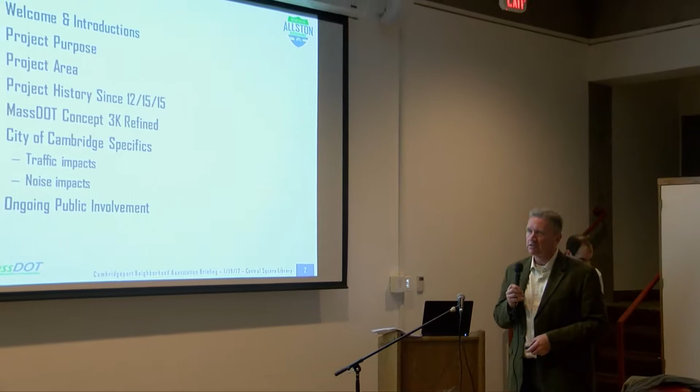So, meeting agenda. I just did the first phase, project purpose. The purpose is that we have a deficient interchange out there right now. The existing viaduct has faced a lot of deterioration over the years. Many people would regard it as neglect, and unfortunately, that is the case.

There is so much demand on the bridges, substructures, foundations, and viaducts throughout the Commonwealth that sometimes our important structures get on a backlog of concerns and immediate repairs. This is one of them. It was built back in the early 60s, so we're here now almost 60 years later identifying the concerns and issues we have.

AET—for all of you, the transponders—all-electronic tolling. This provided us an opportunity to consider how we modify the interchange so it becomes a seamless transition between the existing viaduct and coming out from, say, the Pike, heading west on I-90, without having to go through the various winds and turns that are on I-90 right now.

With AET eliminating the tolls, stopovers, and slowdowns at the plazas, you can go straight through and maintain a regular rate of speed—not necessarily faster than now, but without a lot of the stop and go. That results in a reduction in noise and a lot of the braking actions and trailer concerns.

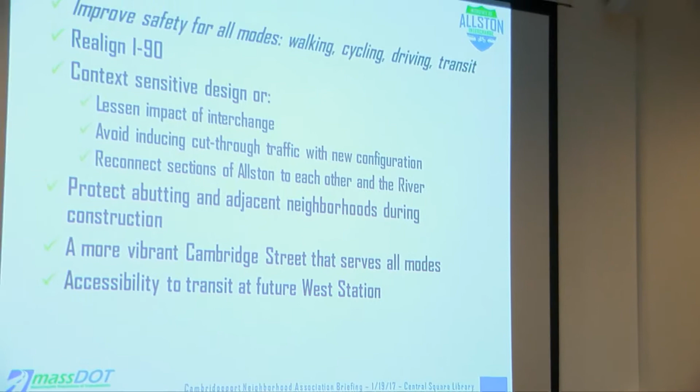What we look at this as being, from day one, is an opportunity to create a fully multimodal interchange. I say that not lightly, because we recognize some of the deficiencies that we have with regards to bicycle, pedestrian, recreational uses, transit, and bus options. Our ultimate goal is to be able to improve upon and address all of those areas that are lacking right now.

There's no laser on this, but I want to—Center button, Mike. Center button. Oh, it is, okay.

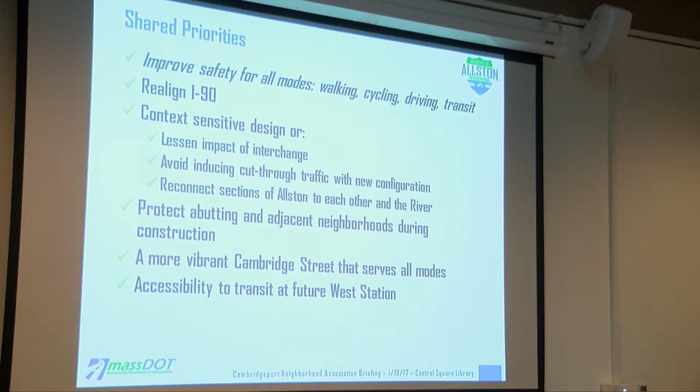Protect the abutting and adjacent neighborhoods during construction. That is of critical concern to us on every project we do. We try to get in and get out and not disrupt the entire livelihood in the neighborhoods that exist, whether it be businesses or residential, whatever the case may be. We strive to do that on every project we undertake. It's not always possible, but to the extent we can, we want to mitigate those and minimize those concerns.

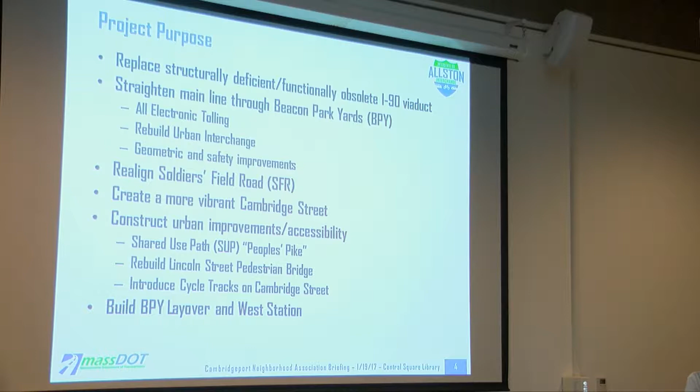Here's the project purpose. There's a lot going on here between replacing the existing viaduct, straightening I-90, and realigning Soldiers Field Road, which is something that has only come about very recently. This gives us the opportunity to realign Soldiers Field Road and to expand upon the existing Paul Dudley White Path, which many of you refer to as the throat, creating additional acres of open space adjacent to the Charles, while at the same time continuing the functions of Soldiers Field Road and I-90.

How does Cambridge Street fit in? Cambridge Street will become the touchdown point for the interchange. What exists right now is really two primary ramps coming off of I-90 east and west. There will be four points of access and egress between I-90 and Cambridge Street, which will then be the separation point between points on Cambridge Street.

I'm confused, because Cambridge Street is, I think, over across the Longfellow Bridge. Oh, that's a good point. Yeah, so Cambridge Street in the Boston area versus Cambridge Street approaching Main Street in Cambridge. I see.

And the layover in West Station, as I mentioned. I see. The project area.

That area right now constitutes about 91 acres. It's significant when you look at it from an elevated point of view—say if you're on top of Cambridge Street at Allston Village, at the overpass, looking east towards Boston, and you look at the entire area once occupied by CSX. It constitutes about 90 acres of land that will be developed at some point in the future.

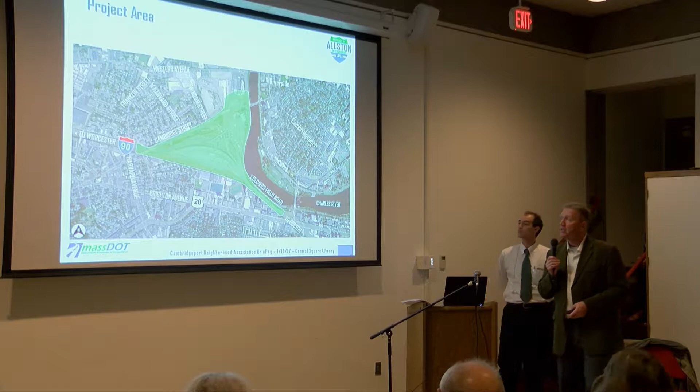The landowner is Harvard University, so there should be no surprises to any of you. It's been long, widespread information out in the public for many years now. But Harvard University owns it. MassDOT retains rights to continue its transportation easements and functions through this area.

I-90, all of the ramps and connecting roads, will bring you back into the neighborhoods. There's a lot of regional use, and we recognize that regional traffic is also being accommodated within a neighborhood, so it's incumbent upon us to try to integrate those two functions—a regional interchange, while also acknowledging that we're introducing regional traffic into a neighborhood.

And this is when I'm going to hand it off to Nate Cabral Curtis, who has been handling our public outreach. He's a member of our design team, and he's going to carry you through. I'd ask that you hold any of your questions until Nate is done. We'll be here as long as it takes for you guys to walk away with all the knowledge you need.

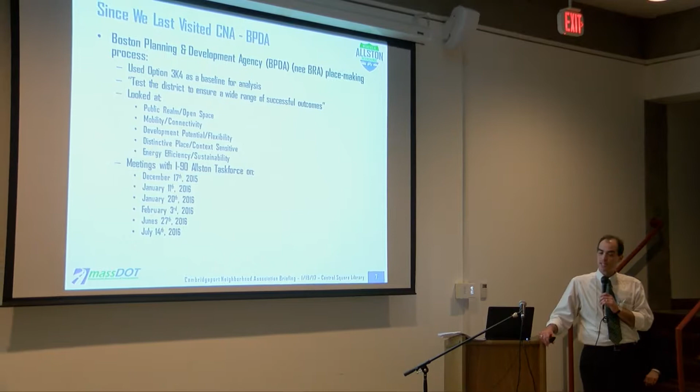When we spoke with you last year, or the year before in 2015, a study was just getting underway in conjunction with this process by the Boston Planning and Development Agency, formerly the BRA. In their placemaking process, they used the option you saw last December as a baseline, called 3K4. The goal, in their own words, was to test the district to ensure a wide range of successful outcomes - can we build a good neighborhood here? They looked at public realm and open space, mobility and connectivity, development potential and flexibility - how easy is it to get various buildings of different types into this space - making it a distinctive, context-sensitive place, and energy efficiency and sustainability. They met with the I-90 Task Force on all these dates, and produced their work in the fall of last year.

Much more information on that is available on our project website.

I'm going to try to curtail as much of the history lecture as I can, because I know at the Morse School meeting people got impatient with me. So I'll speed through some stuff, then slow way down on the Cambridge issues. As the compositor of this PowerPoint, I was happy to know I've touched on all of Mayor Davis's issues, and also Bill Degnan's, who sent them to me as well. So thank you both.

Representative Livingstone, thank you, sir. Do you want to say anything?

I appreciate you coming to Cambridge. This project has a lot of impacts on the neighborhoods - the designers are all across the river - so I appreciate you coming here. A lot of people here have a real say. Thank you very much, sir.

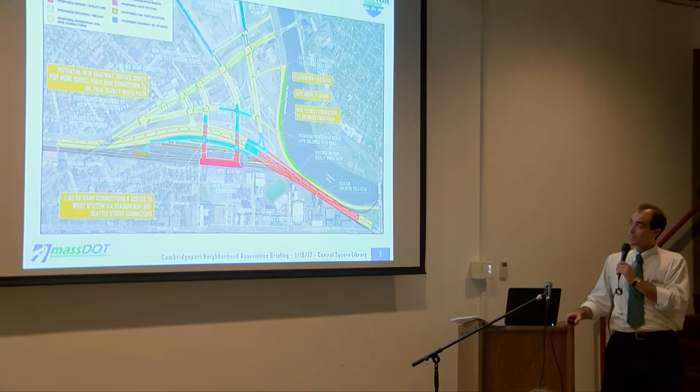Okay, so you'll all remember this. I won't dwell on it, but this is 3K4, what you saw in Cambridge on December 15th, 2015. The BPDA began working on this, and came up with a number of recommendations in all of these various areas.

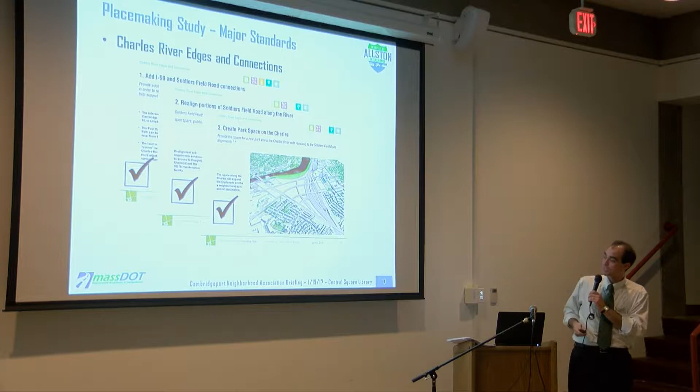Some of these Mike alluded to, some we'll go through here. First, add I-90 and Soldiers Field Road connections - something we'll talk about later, and something our refined 3K includes. Next, realign portions of Soldiers Field Road - currently it runs along the track of my laser pointer, but with the refinements we have the opportunity to drop it further back into the parcel, increasing green space along the river, creating park space along the Charles. This and the right-turn at River Street are linked - by doing this, there's an opportunity to create an at-grade connection, with no footbridge and no dismount, for bicycles and pedestrians from Allston out to the river and the Paul Dudley White path system.

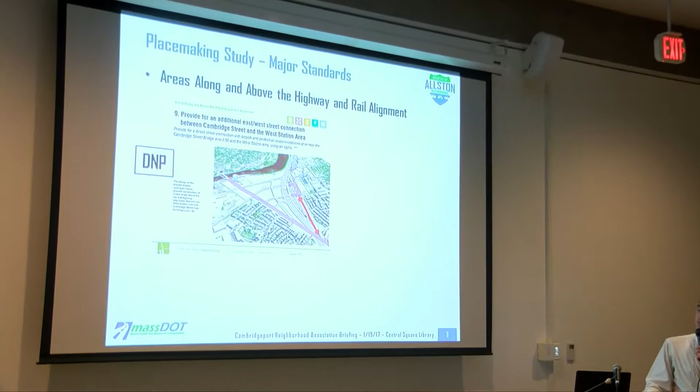I'm also going to go through some things which 3K Refined does not have in them, but carry this symbol, DNP, standing for Do Not Preclude - meaning the design doesn't include it for purposes of the DEIR document, but the design accommodates it. One item was a direct viaduct connection from the Cambridge Street Bridge in Allston over to the area of West Station - do not preclude. Another is a north-south link for shuttles and buses through West Station - again, do not preclude.

And then this was an idea - actually from Cincinnati, where my second in command at Howard Stein Hudson hails from - a bridge with an apron. The idea is to give any bridges we have some space around them to make them a little more livable.

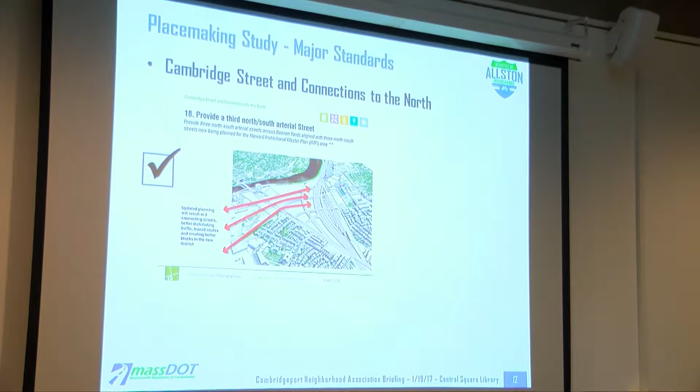Some more items: you'll see three new streets running north off of Cambridge Street and heading up towards Western Avenue - you'll see that in 3K Refined. There's a change in our connection of North Harvard, heading up into the neighborhood and up towards Harvard Square. And we'll strengthen the Cambridge Street edge for early redevelopment along the southern edges. One thing you can't see in 3K Refined, but the plan includes, is cycle tracks and separated sidewalks along Cambridge Street on both sides, and protected intersections in accordance with the new MassDOT and City of Boston guidelines.

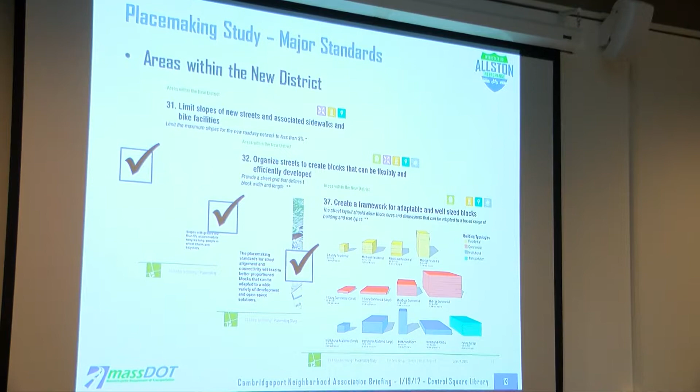Then these are some things we already did: limiting slopes in the new district to less than 5%. We had that opportunity in 3K4, and we're even doing a little bit better now with the refined version. We organized the blocks such that they make easy developing—they agreed we had that—and created a framework for adaptable and well-sized blocks, which again, we have. If you do all those things, you come to 3K Refined, which is this.

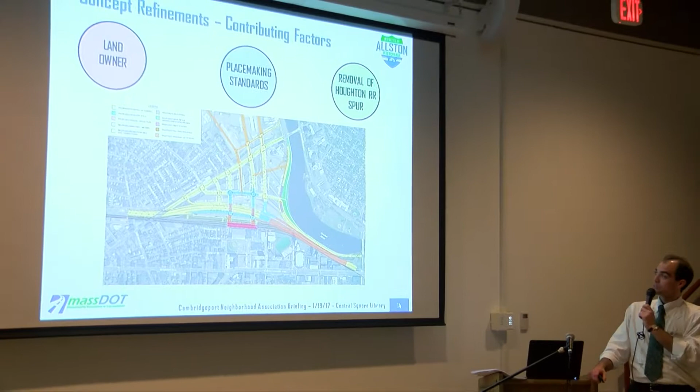So you have the landowner input, which Mike talked about. You have the placemaking standards from BPDA. And in addition, you have the recent arrangement of Bruce Houghton at Houghton Chemical to give up the rail spur that runs right along here, which allows us to perform this shove-over activity. When Mike came before you, I was reading the minutes from 2015—somebody asked, well, can't you just flip the rail spur around? His response was, we've tried that every which way and someone always gets hurt. So in this case, the rail spur will be gone so we can drop the roadway back into the parcel. Those are all some contributing factors to how 3K has become refined.

So now I'll walk you through all those in some detail.

So we're able to realign I-90 so that it is straighter, or closer to straight—it still has a bit of a curve in it. This decreases the slopes going up to West Station, which is great for bikes and pedestrians and people with limited mobility, and it allows some adjustments for the street network.

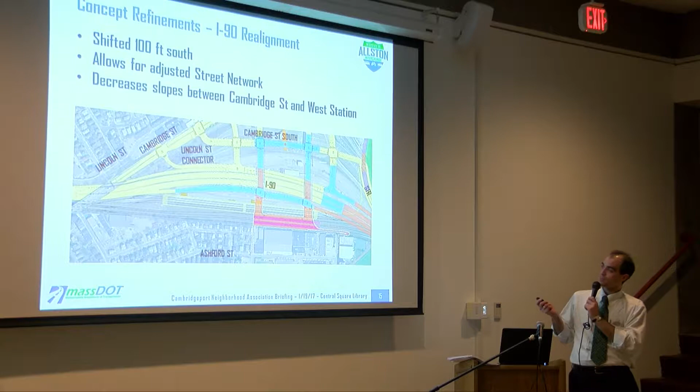So that dotted line shows you the center line where it was in 3K4, and this shows you just how much it's shifted to the south. Now I'm going to come to this, and I'm going to show you this slide again when we do Cambridge specifics.

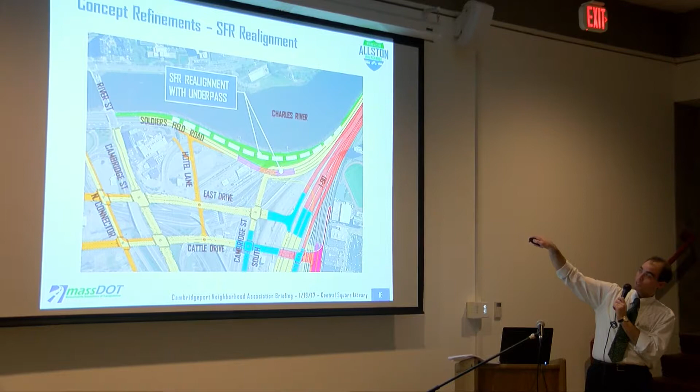So this is also part of the way this works. You have the main line of Soldiers Field Road continuing outbound towards Buckingham, Brown and Nichols, and other points west. It goes down into what we call a boat section, similar to what's up here. That would come down, pass underneath this roadway connection right here at the surface, and then behind this, so you wouldn't necessarily have to get involved in an intersection—you'd have your bicycle and pedestrian connections out to the river.

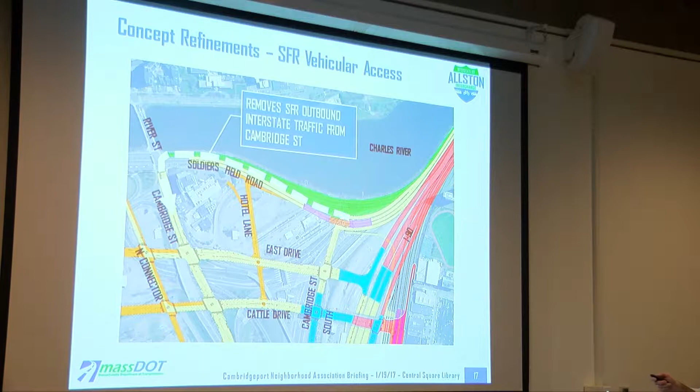Now that comes with a change. So the off-ramps here, to let you make this move and that move, are now accommodated down here. This white arrow that's just come in shows you how the traffic would access—instead of going up here, it would now come down here, go over the top of that boat section, and get into the system here. So now it accesses River Street to go.

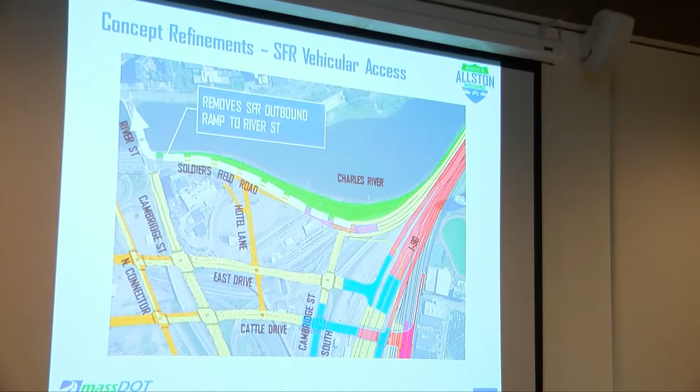Hang on, we'll get to that in a minute. So then this is removed, and I'm going to gently ask people—so that I can get to the Cambridge-specific stuff, specifically the issues about noise—to just hang on to the questions until the end, just as we did at Allston, if you would be so good.

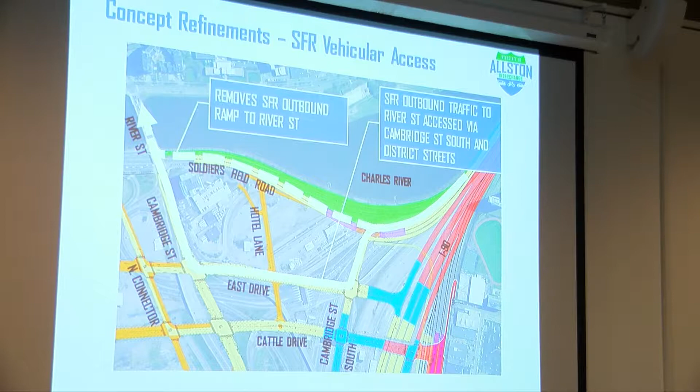Okay, so now this is the thing we want to talk to you guys about at length tonight and get your thoughts on. If you were coming home to Cambridge from downtown Boston or from the airport today, you make this move—take a right at the bridge. In the future, assuming this is taken further into the plan, you would make this move instead. Right now, you pass through one signal. Under this option, you pass through three. So just hold that in mind.

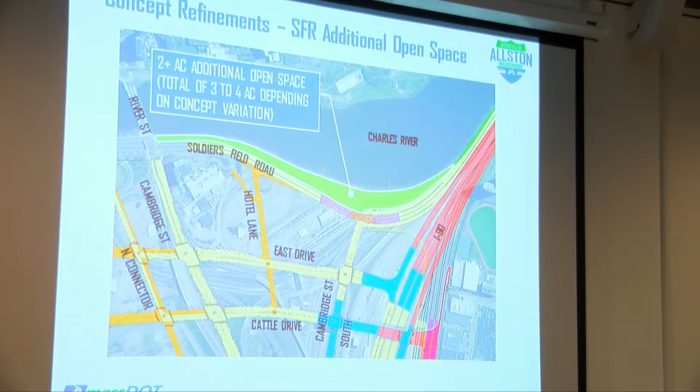The whole thing taken all together, earlier we had looked at realigning this portion of Soldiers Field Road. We could have done that under 3K4. Depending on which option you pick, for the various throat options down in here, you can get up to 4 acres in total of extra green. But 2 of that is always up in here, assuming we keep that.

This is that at-grade bicycle and pedestrian connection that I mentioned. You get the widening at the narrows.

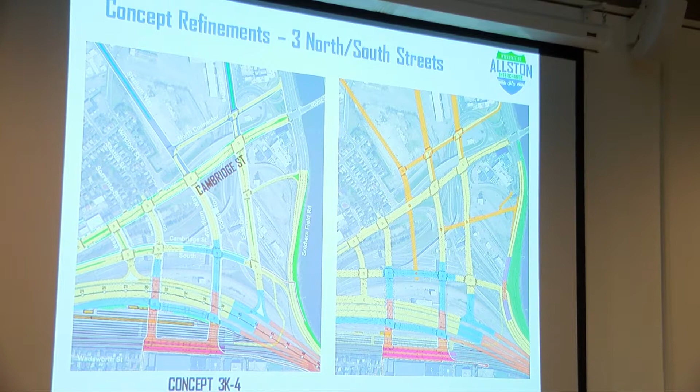Now, this is the 3 streets to the north. In 3K4, there were 2; now there are 3. Part of that is linked to the realignment, or the different connection, of North Harvard Street. Our modeling to date has shown that if you just direct connect North Harvard Street without these 3 streets to the north, all the traffic flows up that way. We've heard from the Allston community that that's their last bastion of owner-occupied housing that's not been taken over by students, for better or worse, and they'd really like to keep it that way. They also already have the 66 bus on there and bicycle lanes, which are heavily used by local folks. So part of trying to make this direct connection work, without causing the flooding of traffic they were talking about, is having these 3 streets running off that way.

So again, just highlighting those. They pass through the Harvard University Enterprise Research Campus.

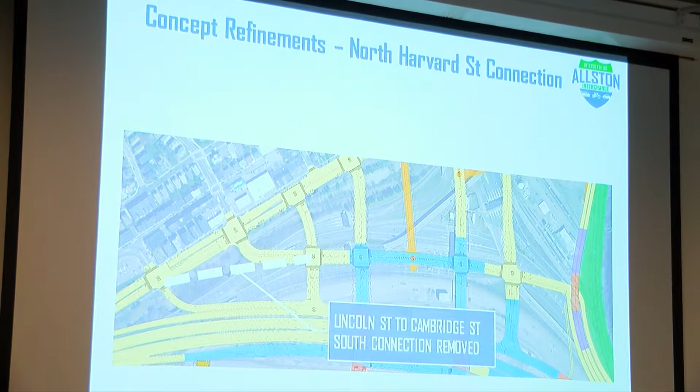Then this is that North Harvard Street connection I mentioned. In 3K4, you would have seen it tying in here, so you wound up with a kind of funny triangular parcel down here. In this case, traffic comes right into this intersection, and if it needs to go up this way, it can go straight across. So there you go.

And then the thought would be that along the top, or northern edge, of what we call Cambridge Street South, you would have a cycle track facility, and a sidewalk obviously, that would bring your riders directly out to the Paul Dudley White Path. At grade here, no footbridge.

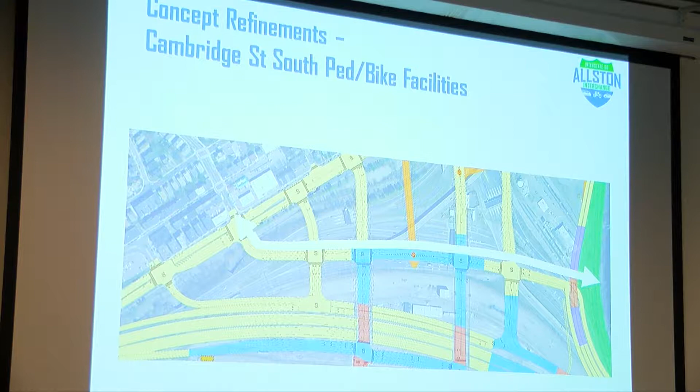And that's everything. I'm not going to read everything on that slide, but that is the handout that you all got at the back of the room, so you can take that home with you. Again, this will be posted on the website. This particular graphic is already up.

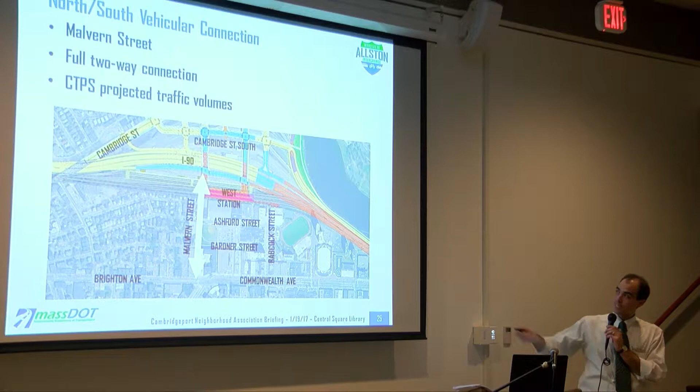Now, this is some stuff that I may flash through if people are getting antsy, but one of the things we talked a lot about was the desire, at least last December, from the crowd we had at the Morse School—the big interest was a transit connection across through here.

The design as it stands today has a bicycle and pedestrian connection which has always been provided here. So bicycles and pedestrians, for quite a while now, almost 2 years, the plan has contained the idea that you'd be able to start out on Cambridge Street, ride along on a separated facility, come up the ramp, get into West Station. If you wanted to drop down, come out Malvern Street and go to Commonwealth Avenue.

However, as part of our MEPA certificate, we've had to look at this for a full vehicular connection that is general purpose, anybody gets to use it, and also transit. So I'll just flash through some of that now.

This is an output from the CTPS model, and in essence what this is showing with this very red section here is that if you create a new general purpose connection for all kinds of vehicles, a great many cars would like to use it. The thought is that causes some changes heading down into Brookline.

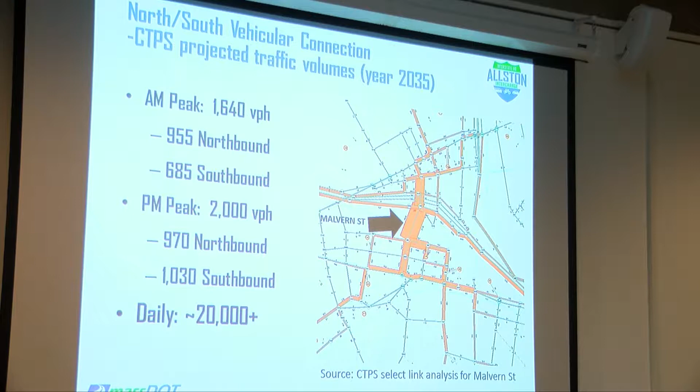I just want to let everybody know some of the traffic data I'm presenting tonight will be subject to change, because 3K Refined needs to go through the CTPS model again. But this is still kind of useful and indicative. So again, general purpose traffic—it's kind of a game changer. And just to give you a sense of this, this is the end of Malvern Street.

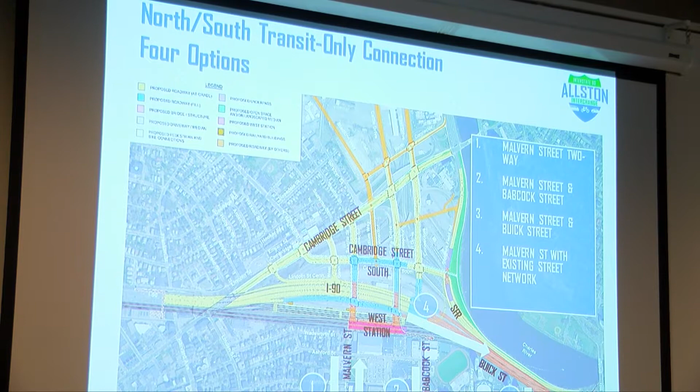It's trying to put a lot of sand through a very small hourglass, I think. It's tight. So then we began to look at, okay, all of these things will be laid out fully in the DEIR document that Mike mentioned, but let's pass on from full vehicular and take a look at transit.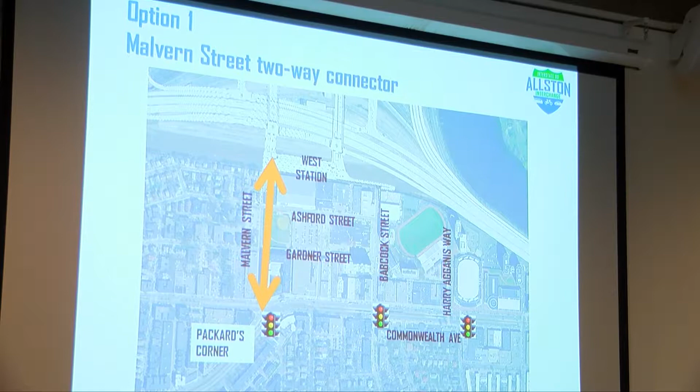We have a couple of different options that we looked at. One is Malvern Street two ways, and that has every transit vehicle going in at Packard's Corner and coming out at Packard's Corner. For those of you who know it, it's quite the complicated intersection. You've got the main line, carriage roads on either side, and the green line. So part of the issue is, right now at Packard's Corner, you have a very long route for a transit vehicle to come out here and head downtown.

That has some issues associated with it, as you can see. One of the big ones is it takes a long time to clear through that intersection, and it's not really set up to have that movement happen. Right now, the only movements on Malvern are this and this. So that's tight, and the expectation is a fair bit of conflict there.

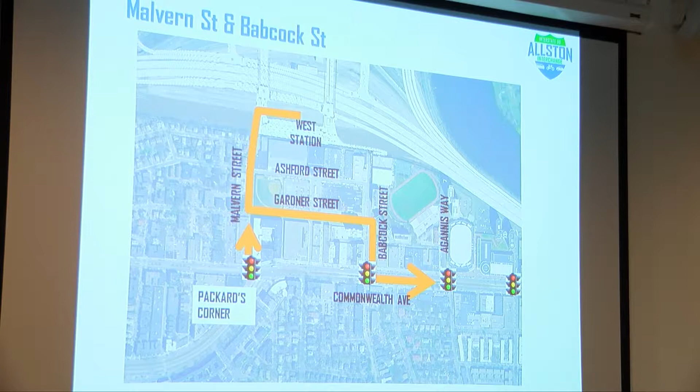So then another option is to come down from West Station and kind of doodle through the campus and come out on Babcock. That also has some impacts, so you have some changes that you have to make. I know this is a bit boring for this side of the river, so we can come back to these. But it does get you out of some of your impacts at Packard's Corner if you take this approach.

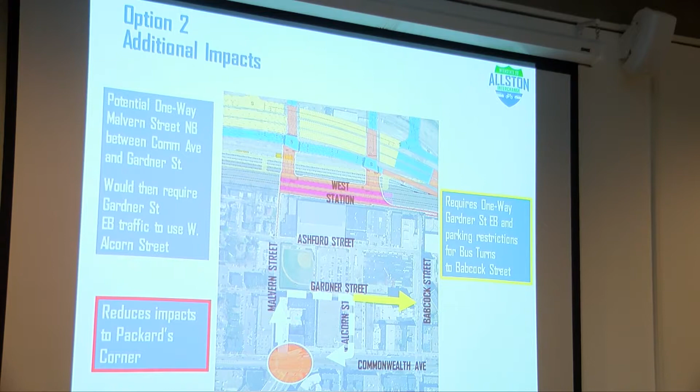It does require some one-ways because you've got to make enough space for the bus to make its turn. One of the things we've heard is that BU already stages a lot of buses through here for sports and games and things. There is somewhat of a difference between moving in a whole bunch of buses for a sporting event very slowly and trying to run a transit service.

So if you go down to this area today on game day, yes, you might see some Peter Pans or Crystal Transport, that kind of thing parked. But it's different doing that and getting 4 or 5 in for a field hockey game versus running them all day. Again, some removal of parking is required to get some of these transit vehicles through.

Then this is another option, Malvern Street and Buick Street. So you have kind of an interesting circulation here. This is your return to West Station, and then you're coming through West Station and out via sort of the backside of the campus in Buick. That also has its kind of ups and downs. These are both private ways owned by BU.

There's also the issue of this being the back of house. So when something happens at Agganis, and there are quite a few events there a year, BU flips the traffic pattern to get people in and out of this place. So you can get a bus or two in there today, but if you're looking at a lot of buses, a steady transit service, there are some changes to be made. And it does come with some private property takings, which we do try to avoid.

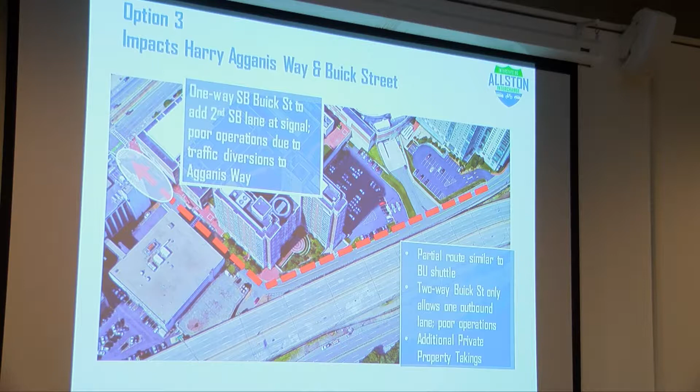Buick Street is a little tighter, so you have to make some changes there as well. And then this is actually one interesting option, which is to use Malvern Street to go in, and then the existing highway system to go out, so the bus could actually travel on the highway, come down, get off around the Prue, make connections in the medical area, and then its return back is something via the local roadway system. All of these options will be explored fully, the ups and downs, in the DEIR document, and you'll have an opportunity to comment on them.

So what to expect in the DEIR? Mike has really kind of gone over a lot of this, but the 3K refined is the option that we think we're taking there. There will be 3 variants for the section opposite Magazine Beach.

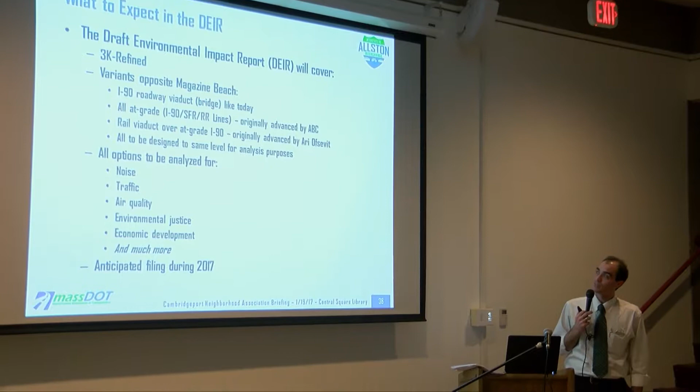So one option is a roadway viaduct bridge, which is what we have today—obviously a different bridge, one that isn't in its dotage. Another one is just doing everything at grade, so that's the rail next to the road, next to the road, next to the road. That was originally advanced by A Better City, so you may have seen that as the ABC concept. And then there's a rail viaduct over an at-grade I-90 and at-grade Soldiers Field, which was originally advanced by Ari Ofsevit. Some of you may know him as the amateur planner.

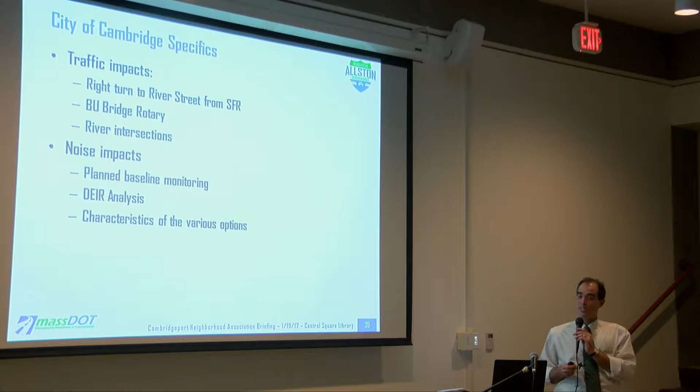And they'll all be designed to the same level for the purposes of analysis. Everything's going to be analyzed for noise, traffic, air quality, environmental justice, economic development, and a whole lot more. As Mike said, it will be a big document. So thank you for your patience. I now want to get to some stuff directly touching on Cambridge.

So I wanted to show you this one more time. This is the removal of that right turn and the left turn, and accommodating those turns at this boat section, and sort of a flyover of it right here. That's what the proposed 3K refined has in it, specifically for folks coming home to Cambridge.

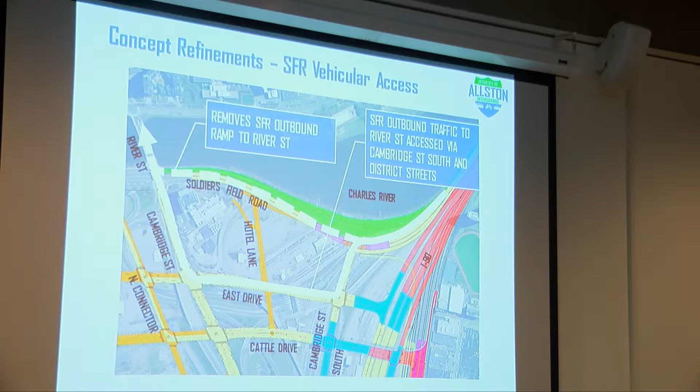Where does the left turn go? The left turn would actually be accommodated at the same location. So if you were to make a left at this location today and head over to one of these highway ramps, you would get off here, truck down here, and instead of making this off to Cambridge, you could head off into the ramp system this way.

So that's a trade-off, and I want to get your thoughts on it tonight. It allows a real alleviation of the narrows on the Paul Dudley White path. There's a direct connection for Allston cyclists, obviously, and it provides your Cambridge cyclists with a safer right turn coming back over the bridge because it's a bigger space and they're less likely to tangle up with somebody else.

From the car perspective, there's roughly 9,000 vehicles turning right to Cambridge every 24 hours. There's 87 during the peak hour in the morning, 151 during the PM peak hour. Again, all these things will have to go through the CTPS model again, but speaking with Eric Mackey, our traffic engineer, right now the back-of-the-envelope estimate is 3 more signals and roughly 3 minutes of additional delay versus the direct connection today.

One of the questions posed to us is, well, could you just keep the right turn? The issue is you can't keep a single right turn exit to Cambridge because of the width you need. You need an 11-foot lane for the turns, plus an 8-foot clear travel lane in case somebody breaks down in the actual turning lane. You need to be able to squeeze an emergency vehicle by. So from a roadway perspective, it seems like, again pending full analysis in the DEIR, it's a bit of an all-or-nothing in terms of pavement there for cars.

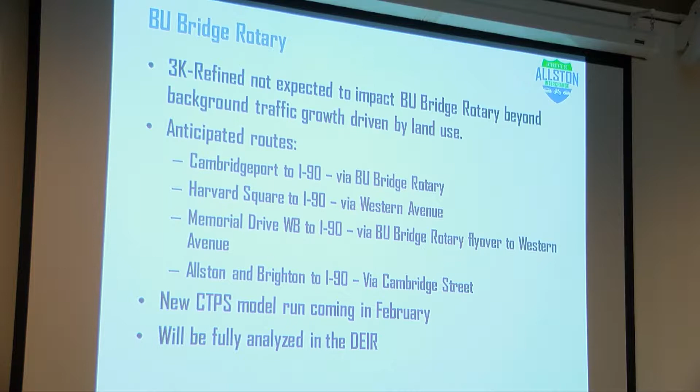BU Bridge Rotary: the 3K refined, again these are back-of-the-envelope numbers from Eric, will be discussed further in the DEIR, but it's not expected to really impact the BU Bridge rotary beyond background traffic growth driven by land use in the area. These are the anticipated routes we feel traffic would take, and as you can see it's a limited population looking at that as a route to the BU Bridge Rotary. One thing we'll have to test is if you had a direct connection down to Commonwealth Avenue for general purpose traffic, you might see some changes there.

Again, new traffic data coming in February, full analysis. The River Street intersections — I think of it as the four square, so the 2 River Street intersections and the 2 Western Avenue intersections. We have ongoing discussions with Bill Deignan and other members of the Cambridge traffic transportation staff on that. The current thought is a leading pedestrian interval on all of those intersections to help cross bikes and peds. The interchange design going from 3K to 3K refined doesn't really change how people would use those intersections, but some of the land use decisions within the parcel, depending on what goes there, could impact the volumes.

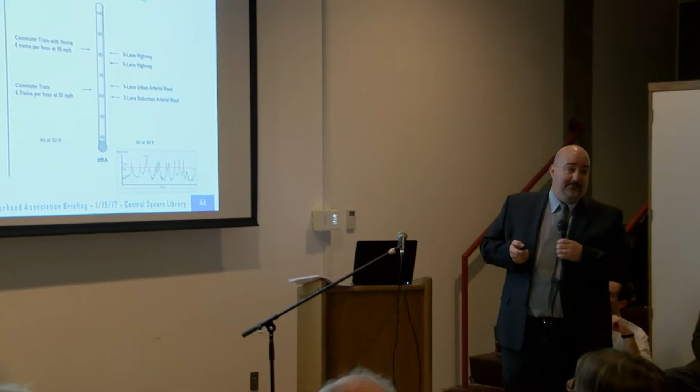As you can see here, we can certainly understand what the maximum sound level is of some of these events. When a truck goes by at 50 feet, we might have sound levels up at 80 decibels. Comparing that to some of the noise sources that we commonly experience indoors, we might correspond that to shop tools or a food blender.

And so this maximum noise level is very intuitive, but it doesn't really relate to how we feel and whether or not we're annoyed by noise. When we're looking at noise impact, that's really the fundamental thing that we're trying to minimize, is the potential for humans to get annoyed by noise.

And so to do that, we look at a sound level called the LEQ. This is an equivalent sound level. You can see here sort of the time-varying nature of sound. It rises and it falls. The LEQ is an energy average of that sound level as it rises and falls over a given period. We look at the loudest hour of sound, and that is the LEQ, and that's how we describe sound.

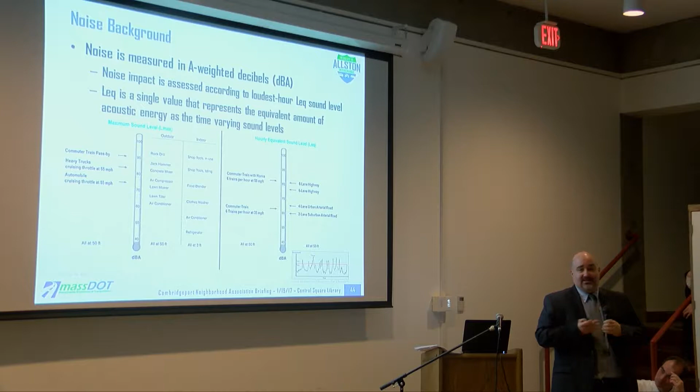Some important things to understand in terms of the physics of sound is how does it relate to traffic noise? Well, certainly the volume of traffic is a very big factor in determining how loud the noise is at your location, at a receiver. So if you double the amount of traffic, let's say you have 2,000 vehicles in an hour compared to 1,000, that's a 3 decibel increase.

The number of trucks, sort of the fleet that is driving on the roads, is also an important factor. Trucks make a lot more noise than automobiles, and so one truck is actually equivalent to 28 cars when you're traveling at 55 miles an hour.

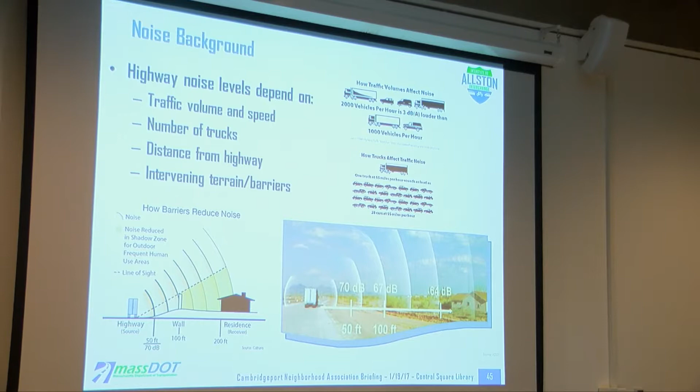And of course, as we all understand, sound reduces with distance. When we're talking about highway noise, that relationship is to reduce noise 3 decibels per every doubling of distance. So as I was showing, some of the sound levels from roadways might be 80 decibels at 50 feet. At 100 feet, they reduce 3 decibels and be down to 77 dB.

Another thing to understand with noise is that the path that noise takes to get from the roadways to residences, to schools, is also a very important factor. When you have intervening objects such as noise walls, such as Jersey barriers, such as buildings, when you can't see the noise source, that's a fundamental effect to attenuate the sound. And so these are all the things that go into the model and our predictions of what the future noise conditions will be like with the project.

So where are we with this noise study? We have conducted noise and vibration measurements throughout the entire study area. We conduct these measurements in order to develop a model. These are models that are developed by the Federal Highway Administration and the Federal Transit Administration for trains. And we conduct noise measurements in your communities to make sure that the model that we're using is valid and that it's providing accurate results.

So we are in the process of conducting this modeling for future conditions. We have an understanding of what it is now, of what the existing conditions are, and I'll be presenting some of that information to you. But it's important to understand that it's really a factor of what the future conditions will be and whether or not the noise levels will exceed certain limits in terms of whether or not there are mitigation that may need to be introduced to the project.

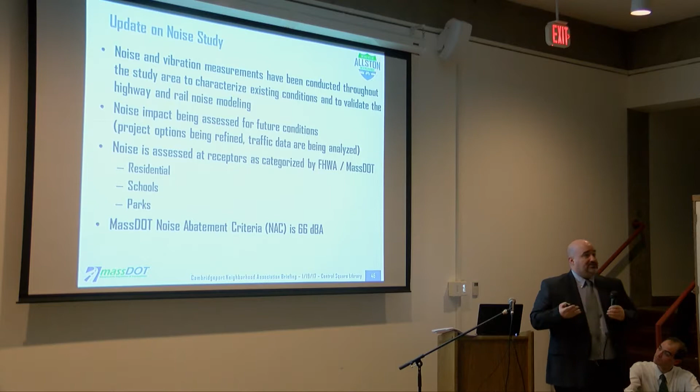As Nate mentioned, the CTPS traffic data are currently being updated with the refinements to 3K, as well as some other refinements to the geometry that are ongoing. When we look at noise, noise isn't assessed everywhere.

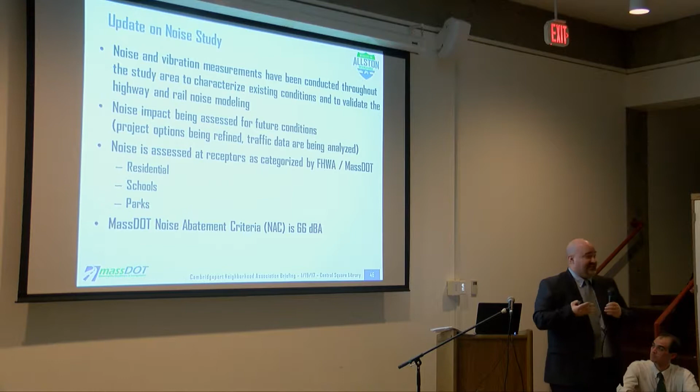There are some areas that noise has a greater effect on us, and that's certainly our homes, residences, schools, museums, libraries, places where peace and quiet have a lot of value, where noise might interfere with speech or sleep. Areas that noise does not get assessed, or is not really considered a receptor, include industrial and commercial areas that primarily have daytime use and generally higher background noise levels.

This is all based on standard guidelines from the Federal Highway Administration. We also look at parks, which is also a very important area—parks with passive use where there's benches, picnic tables, places where peace and quiet is of value. Noise gets assessed at parks as well.

When we look at noise, we really look at whether or not the noise levels are exceeding a noise abatement criteria, and whether or not the project needs to evaluate the feasibility and reasonableness of mitigation. For residential receptors, that noise abatement criteria is 66 dBA. So that's an important number to understand—as sound levels approach or exceed 66 dBA, they're breaking a threshold.

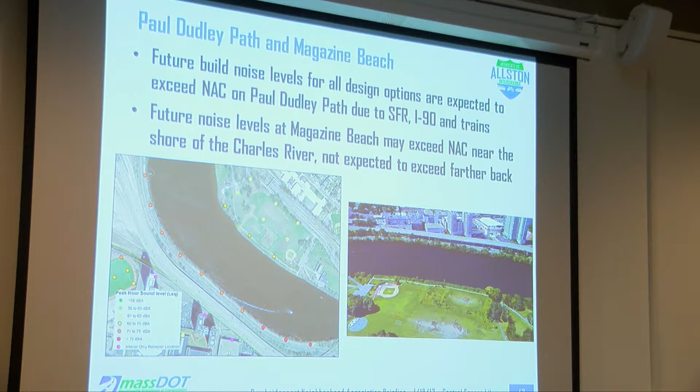What we're showing here in the colors is what the general noise levels are right now—what we understand about existing conditions. Along the Paul Dudley Path, which is considered a trail or park use, we have high ambient noise levels right now, between 71 and 75 decibels, exceeding the noise abatement criteria for park use.

When we look at Magazine Beach, as a function of the distance that Soldiers Field Road and I-90 are from Magazine Beach, the sound levels attenuate significantly. Receptors just along the trail, near the shoreline, are just barely exceeding the noise abatement criteria. As we get farther back, closer to Memorial Drive and more in the middle of the park, these sound levels are below the noise abatement criteria right now. This is our understanding—we've done measurements and modeling, including contributions from both highway noise and rail sources.

So what does this tell us? This tells us that we understand future noise levels at Magazine Beach may exceed the criteria just at the shore of Magazine Beach, but not necessarily much farther back into Magazine Beach.

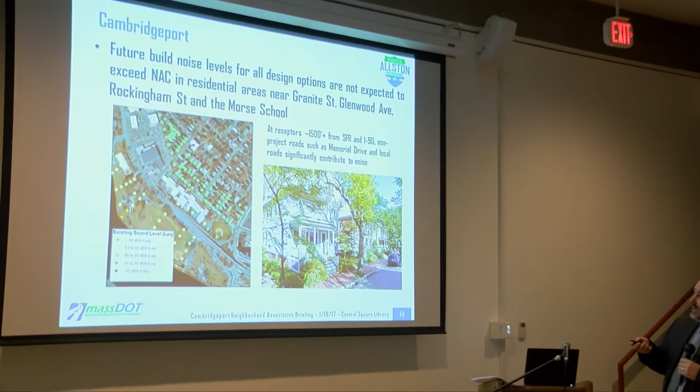So we're also looking at receptors deeper into Cambridgeport. We've heard that this is of concern to the community, and we want to know what the noise environment is and whether different project decisions can affect the noise in the community. Looking at receptors on streets such as Granite Street and Glenwood Ave and at the Morse School, we find sound levels significantly below the noise abatement criteria. A measurement at Glenwood Ave showed sound levels in the upper 40s, around 50 decibels—15 or 16 decibels below the noise abatement criteria.

So what is contributing to the noise environment here is a lot of other noise sources besides I-90 and Soldiers Field Road. Memorial Drive is one of the more dominant noise sources here, but you also have local traffic on Magazine Street and other roads contributing to the noise environment.

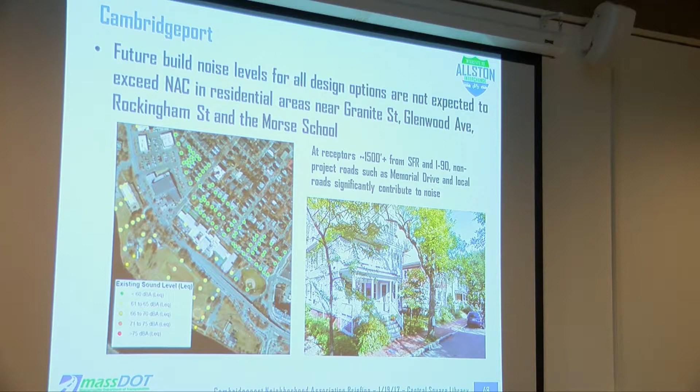When we look at noise throughout this community, I want to make a point that we look at noise in areas of frequent outdoor human use. For example, this two-family home—for the first floor, we'd look at a receptor on the porch area, perhaps on the ground. For the second family, there's a nice balcony here where there's frequent, or soon to be frequent, outdoor human use, and we'll look at a receptor there as well.

Moving further up towards Riverside, we have this high-rise building with balconies. We'll be looking at the noise at all of these receptors along those balconies. We're also looking at noise up here by the Riverside Press Park.

As you just understood from Nate, there are some project improvements to Soldiers Field Road as it comes up to River Street, and while this is at least 500 feet away from those roads, we're looking at the noise that currently exists at these receptors.

What we see is that we have orange dots here. The orange or the red are showing that they're exceeding the noise abatement criteria. But what's really important to understand is why those noise levels are above what they are. It really is a function of the traffic on Memorial Drive and on River Street.

That traffic is much closer to these locations than I-90 or Soldiers Field Road. So we're going to be looking at these upper floor receptors, and while we have noise levels that exceed the noise abatement criteria, it's primarily due to the contribution of noise from Memorial Drive and River Street. So when you understand that, it changes the evaluation of the different options for Soldiers Field Road and for I-90 will have a minimal effect on the noise environment at these receptors, because none of them are going to be changing the noise from Memorial Drive or River Street.

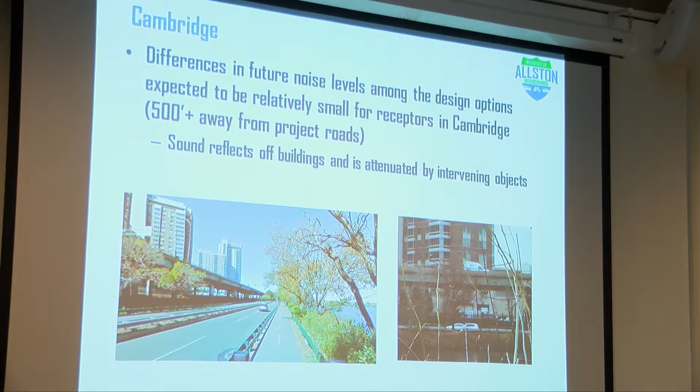But as we're talking about Cambridge and being on Magazine Beach, some 500 feet away, this is a picture taken from Magazine Beach. You see Soldiers Field Road, you see I-90 here.

The idea of shifting Soldiers Field Road 10 or 20 feet to provide for more park space does not really have any significant effect at Magazine Beach, because it's already 500 feet away. If it's 510 feet away, it's not going to make a significant difference in the sound propagation.

Similarly, with the viaduct versus at-grade options, you're going to have very similar effects of what will be shielded by the project, whether you're looking at some of the at-grade alternatives or the 3K4 refined alternative.

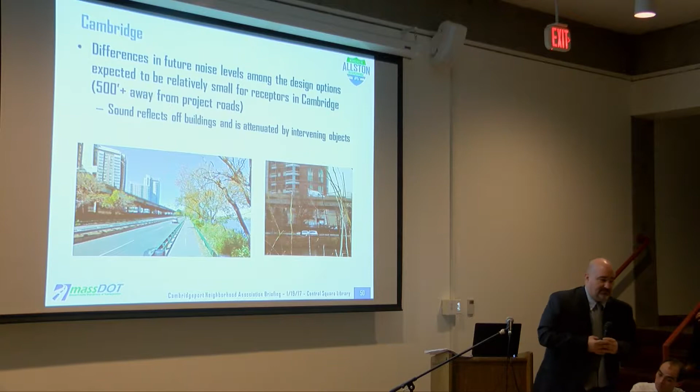One other thing we've heard from you, especially from residents that have been there a long time, is how new developments might change the noise environment. For example, with the BU dorms, we've heard an observation that noise has been bouncing off the BU dorms and coming back into the community, and that's certainly a physical effect. Sound will bounce off hard surfaces and can get back into the community.

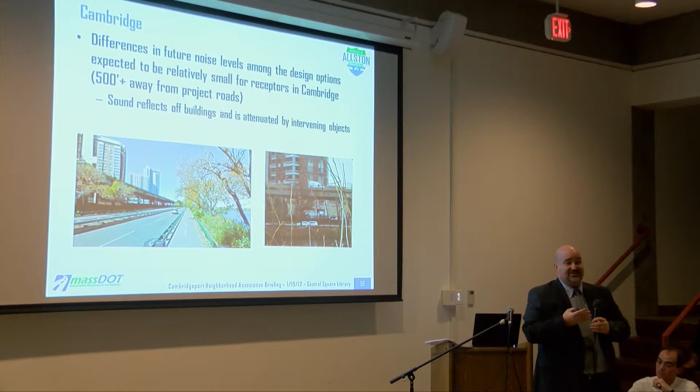But in regard to the other noise sources, being the rest of the highway that isn't near BU, or Soldiers Field Road, or the local roads, this observation would most likely be just a slight different character to the sound than a real change in the absolute sound level.

So what's going to happen as we start understanding more about what the future conditions will be throughout the whole study area and certainly within Cambridge? Well, as I said, when noise levels exceed the noise abatement criteria, there are very clear guidelines in whether and how you evaluate the feasibility and reasonableness of noise mitigation, noise walls.

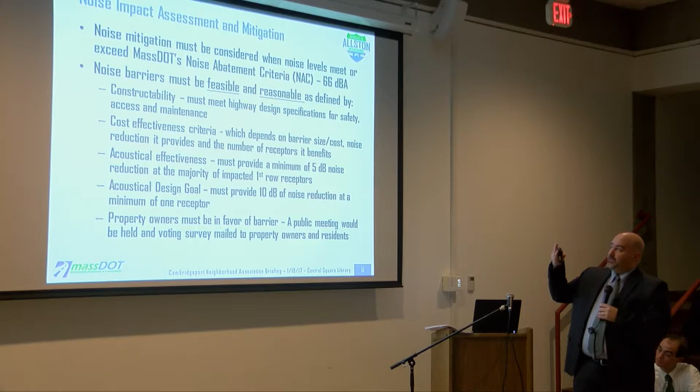This is a process that all state DOTs follow. It's important to know that there are numerous projects throughout the Commonwealth, and the need to prioritize and decide where noise mitigation is most effective and where it's warranted is an important process that needs to go on. That's why there are these guidelines in this process to evaluate that. First and foremost, it needs to be constructible and safe.

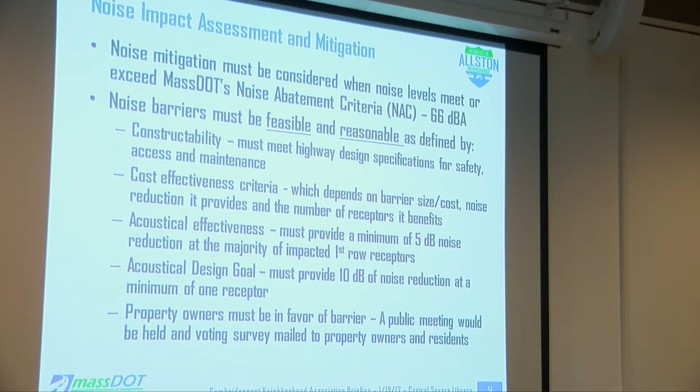We need to have safe highways and safe roadways, so there are various factors that a noise wall can influence regarding the safety of a highway. You need adequate space from the road so that if there's an accident, you're not crashing into a wall. There's the need for snow removal. There are lines of sight that must be maintained if you're building barriers up to intersections, making sure you're not limiting the lines of sight for drivers. That's a very critical and first and foremost aspect.

The other thing is that the expense of mitigation of noise walls must be reasonable. So what you do is look at the cost effectiveness, which depends on the size of the barrier and the amount of noise reduction it provides to the community. When receptors get about a 5 decibel noise reduction or more, that's considered a benefit, and those receptors, whether or not impacted, help support the calculation of determining whether a barrier would be cost effective.

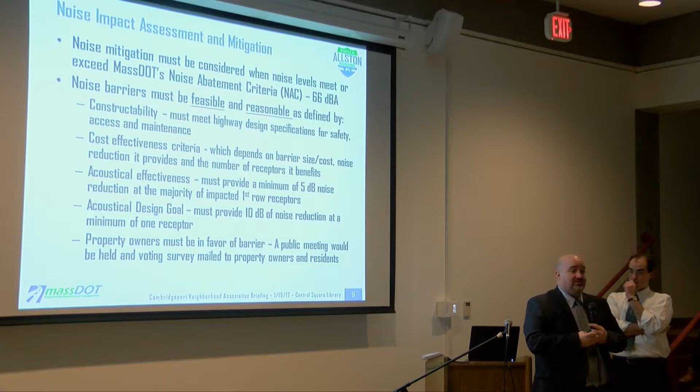But it must also be acoustically effective. So when you're looking at the first row of receptors, you need to make sure that noise mitigation is going to provide a minimum of 5 decibels of noise reduction. In some circumstances, noise walls may not be effective. If you have, for example, receptors on high floors that would just see right over a noise wall, that's not going to be effective. If there are already intervening objects, introducing another intervening object, being a noise wall, can often have very minimal effect in reducing noise.

Another acoustical factor is looking at whether or not it would provide at least 10 decibels to one impacted receptor, and that is an acoustical design goal that must be met.

Ultimately, the decision for moving mitigation forward is that it needs to be wanted - it needs to be desirable to the community. So there's a process where there's a public meeting, and information about a proposed noise barrier that was found to be cost effective and acoustically effective is presented to the community. There's a voting survey done to understand whether the abutters and those that would benefit from the noise wall would like it. That's part of the process as well.

And that's all I have for noise - I think I can just wrap it up.

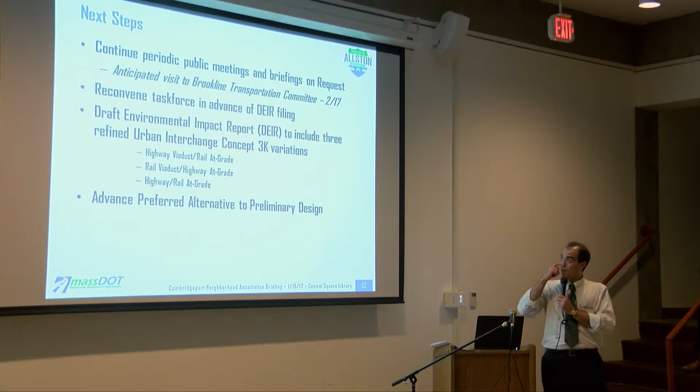Thank you, sir. So, next steps - we will continue public outreach. As Mike said, this is one step on a long road. We anticipate being in front of the Brookline Transportation Committee in February. We're not exactly sure when we'd pull the task force back together again, but we think it would be sometime in advance of the DEIR filing.

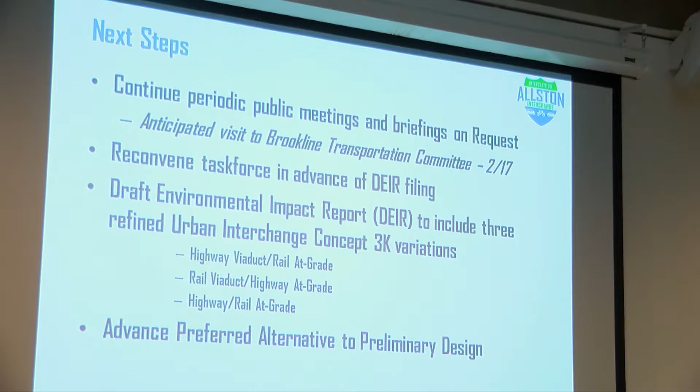The DEIR filing is going to include the 3K refine that you saw, with a full accounting of these various options for what's known as the throat section - that's really the section opposite Magazine Beach. The term throat is used extensively by the task force. I keep looking for the project's ears and nose and eyes so I can get the full medical approach to it. And then, once we get through the DEIR, that's one more step along the road to advancing a preferred alternative into a preliminary design.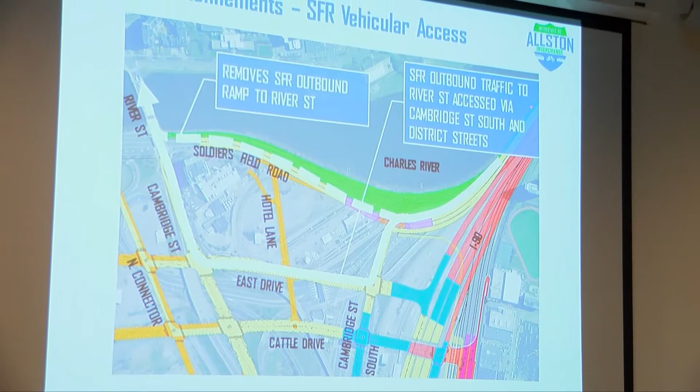Okay, so today, let's say you're coming home from the airport and you come up Storrow Drive and Soldiers Field Road. Today, no, I-90. So if you were getting off I-90, let's say you took the Williams Tunnel, coming up from downtown, you'd split off from the main line of I-90 right about here, come around, get into this intersection, come across, come up here to Cambridge, and you'd be able to head home that way.

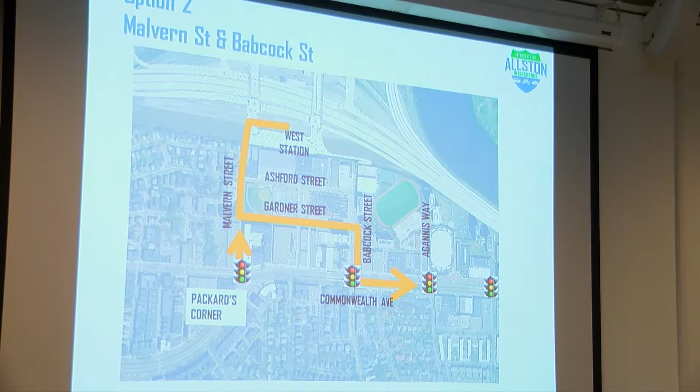Now if you just give me one more minute to give you a broader view of the space. What about coming down? I wanted to give you the full picture. Okay, so let's say you've come across up here at Western Avenue, and you've made your left, you're onto Soldiers Field Road. There would be this thing we call North Connector, you see this yellow line, the North Connector right here. So you would be able to come down here, turn this way, come across this intersection, come down here, and now you're able to access the ramp system from this point.

So you still have access to the turnpike. It does change a bit. One of the things this intersection is currently known for is it has all these entrances and exits and a great deal of pavement, and it's very scary for pedestrians and cyclists. Part of what we're trying to do with this North Connector Road is pull some of these swooping turns out of it so that these turns happen in more of a right angle method, and it's a little more comfortable and slow for everybody.

Would it be 5 years without access for construction? So the goal would be to preserve access for all at the most times possible. I'm living in a construction project right now on the Casey Arborway, my house has a ringside seat. But there are times where, late at night, if we were to close something overnight or over a weekend, we could greatly speed things up and ease the long-term low-level pain by ripping a Band-Aid off, that option would be investigated. But the goal would be not to just say folks in Cambridgeport aren't going to the Mass Turnpike for the next 5 years.

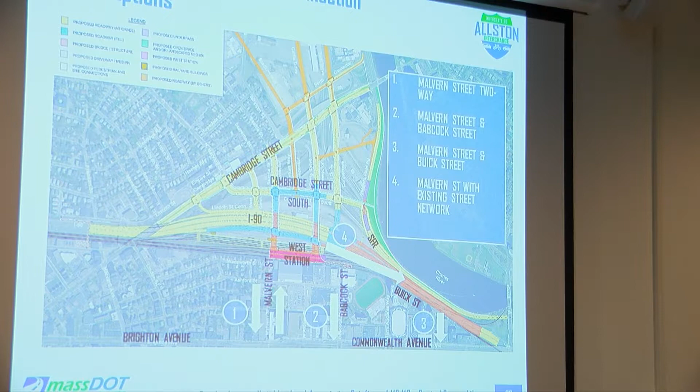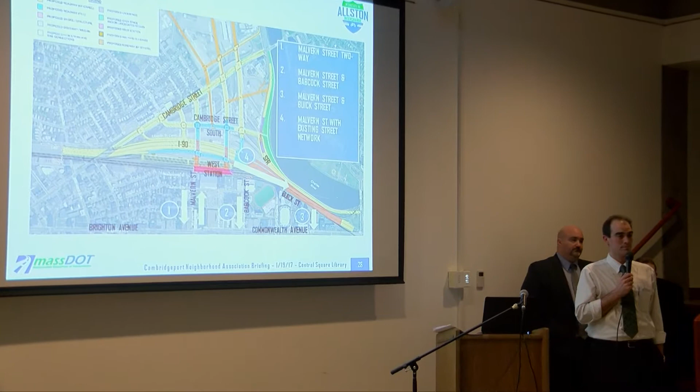So, Councilor, just a couple of quick responses. I understand the desire to push Soldiers Field Road deeper into the parcel, but there are geometric concerns with too much bend, and there are also implications with the landowner. The other thing I'd note, and I did flash through it, but the BPDA study did talk about how they might organize green spaces within this area. We're not showing them because we're trying to showcase the roadway connections, but the idea wouldn't be that this would just be straight-up boulevards with buildings all over the place. The idea would be to develop that space with some green to break it up. We're only talking about DOT, we can't control the other one now, we'll do that in the future. But I'm sure Harvard wants a significant waterfront park for their upperclassman dorms, just like they have elsewhere, so I think we can help you on that. But the geometry can be improved north of Cambridge Street to widen the park. In fact, I saw a scheme earlier tonight that does that.

You mentioned, with a lot of words, we know there's a lot of stuff to go through, but it would be great during the noise study, when you say 10 dBA is this and 5 is that, to have a diagram next to it showing what 65 dBA relates to, what's the difference between 5 and 10. It's a number that sounds reasonable, but 65 is an average, which means half the people in this room don't like 65, the other half thinks it's fine. So generally you worry about the 20% in the most critical area, which I suspect is lower than 65. Could you tell us what 65 was equivalent to? Was it the air conditioner? I know it wasn't a truck. Yeah, that's right there.

It's a lot of slides, and a lot of information. Yeah, yeah, there you go.

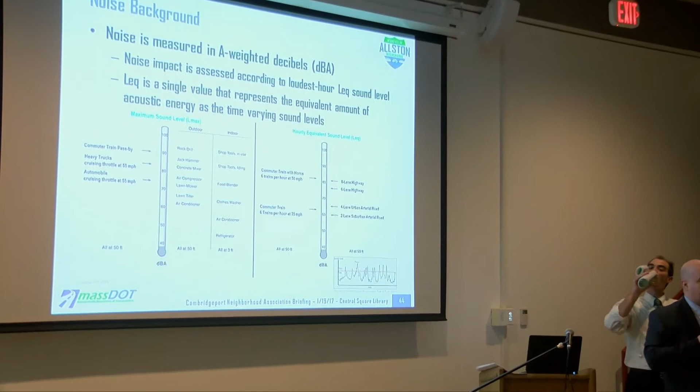When you're talking about sources like trains, those are intermittent noise sources. Highway and roadway noise is relatively constant. So when you compare noise to constant sources indoors, you can make a reasonable comparison. A food blender at 3 feet, when you're using it, is a pretty loud condition - that's 75 decibels. An air conditioner on constant at 50 feet, an outdoor unit, might be in the low 60s.

To speak to your question about the criteria - there's been a lot of historical research done by the EPA, by the FHWA, in understanding what is a significance threshold, where you need to draw the line to determine that you've annoyed too many people to develop a criteria. But again, half below, half above, as far as being affected by it - that's what I'm getting at.

Actually, it's far less than that. For example, with aircraft noise, with a 65 DNL - that's a day-night average sound level over a whole 24-hour period - they have a threshold of significance when annoyance reaches 12%. So it isn't just that 50% of people are annoyed and 50% are not. The sound ordinance in Cambridge says that's what it's supposed to be, and it annoys the heck out of people even when it says 65. So I'd be careful about that number.

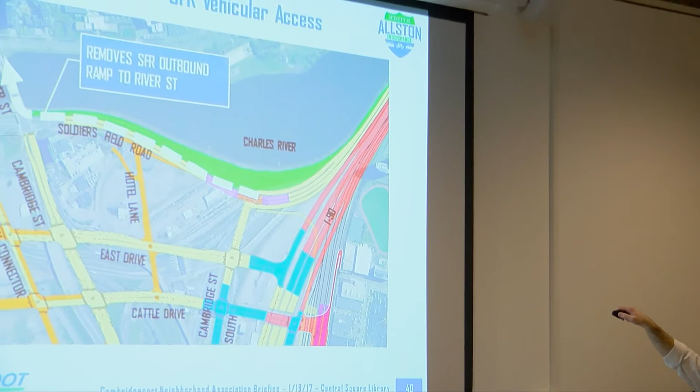Well, so a couple of points, and I'll take a first swing at it. The concern expressed is that this is an awful lot of traffic funneling through this one intersection, and isn't it a potential bottleneck? So I'll take a first whack, and then I'll see if I got it right, and I'll turn to the rest of the team for further input.

One thing to note is that in terms of turnpike traffic, you can't actually see it here because it would be down right about there. But the goal is to have, today you basically have one big entrance point funneling into the turnpike and one big exit point funneling out of the turnpike. And yeah, they split up at the end, but it's really, everything's tied to Cambridge Street. It's sort of one of two crucial points.

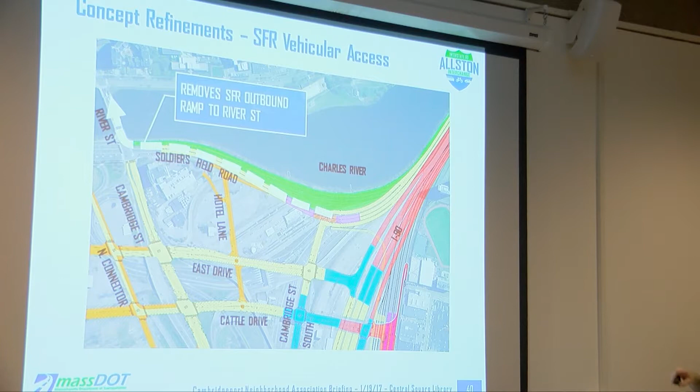With this, turnpike traffic would have another connection to this ramp system along here that would get traffic, you could get off and get up to Cambridge Street there as well. So there's 2 points of entrance and exit to the turnpike rather than just one big one. So the idea is to help kind of break the cars up.

The other piece is, yes, you're right, it is an awful lot of traffic going through there. All of the lane counts here are subject to revision through the next run of the CTPS model, but everybody counts lanes, everybody wants to see. This is one of the most lane-filled intersections in the site for the reason that you mentioned. There are a fair number of those lanes that are turning lanes. I'm not going to try to count it off from right here, especially with it subject to review, but that could be the biggest one in the whole parcel. So that could be the largest one right there.

So is there another solution where you don't have everything coming there? Well, the solution is to keep it the way it is, yes.

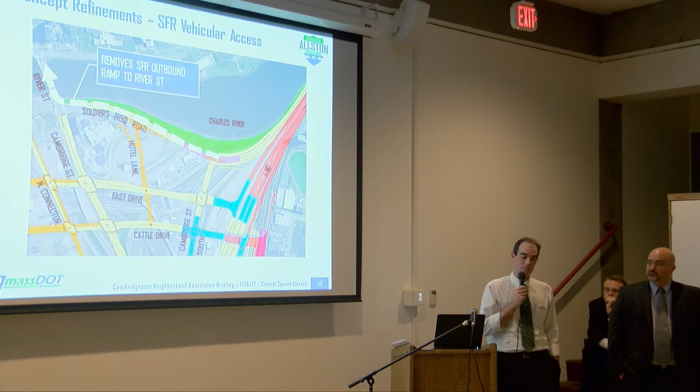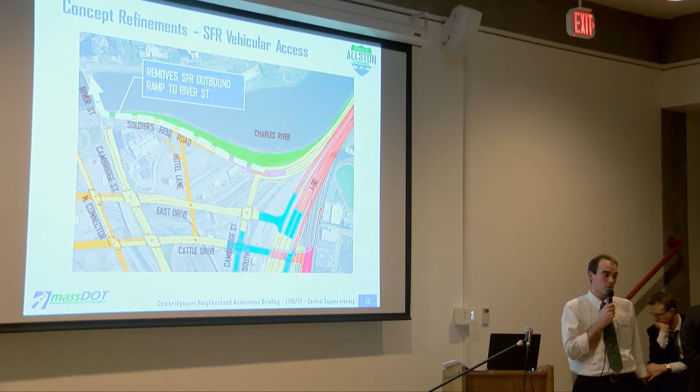So it's a wedding of both man and machine there. In speaking with Eric Mackey at Tetra Tech, who's the traffic engineer for this, the changes here aren't necessarily, because of the sort of regional nature of the interchange, going to push people to say, oh, well, Memorial Drive rather than Soldiers Field Road. The issue does become that there's a lot of development going on in Cambridge, there's a lot of development going on beyond Cambridge, and a certain number of vehicles are going to want to use that regardless of how you configure the interchange.

So right now it looks like it's between 3K4 and 3K refined. It's pretty much neutral in terms of between the two options. But again, the idea of do we suddenly push a lot more traffic to one location where it wasn't before, that's the kind of thing that would be explored with the EIR. And that also would feed into Jason's calculations of the model. Anything else? Good? All right.

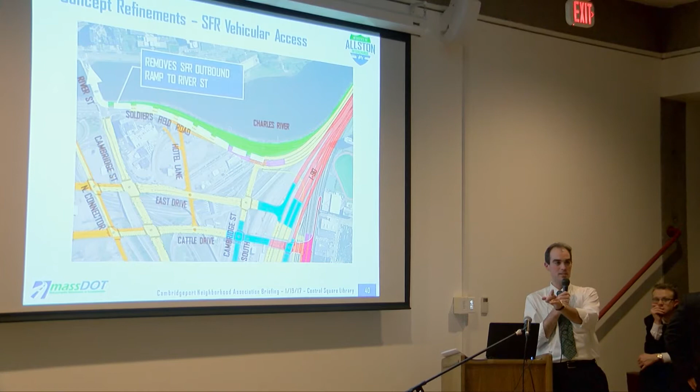All right, I'm going to come back down this side. Yeah, I was waiting for you to get back to your seat. Thank you. Yes, Mayor Davis.

So I'm concerned also about the access and egress to the turnpike. And right now, we're in a fairly favorable position in Cambridgeport and Riverside, getting to the turnpike and getting home. And following up on your conversation right now about are people going to switch to Memorial Drive? Well, the Storrow Drive option is also being made less agreeable. So I'm really looking at it from outbound from Boston and inbound, but there are actually 8 different movements that you're talking about here that are going to be affected on Storrow, coming and going, and on the turnpike.

And I just want to make sure that the CTPS model is really looking at what happens to the time of access or egress from the turnpike or Storrow Drive to Cambridge. And I think if it's greatly increased, then you will see a lot of changes in people's behavior. Plus, I fear, in the ever thinking of economic development in Cambridge and the fact that people want to get home and they want to get to work, are these changes really going to slow everybody down a lot? I don't know. I just don't know.

And I just want to make sure that your model is designed in such a way that you're going to capture all the impacts. I'd like to say that we like to think that we're all bikers and walkers, but sometimes we all get in our cars, right? Don't we? And so we want to be able to move around that way as well. And I want to make sure you're capturing all those changes, and I haven't heard that from you.

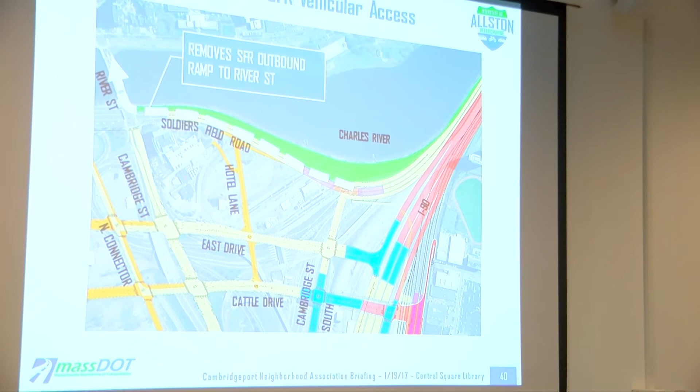Very simple. I'd like you to point out on this image where the Houghton gas tank things are. Where are they? Is that the hotel? This is the hotel. This is the gas area. This is the rail spur.

Okay, so that's all going to stay? Yes, the Houghton site stays, it's just the spur rail that goes. All right, business and economic opportunity.

Next, go ahead, Steve. Yes, this room has a noise problem. Everybody's noticed it. People are not hearing what's going on. Why? Because there are fans in the ceiling making noise that conflicts with what we're saying and what we're hearing. Traffic will do the same thing if there's background noise from traffic. It may be wonderful on his measurements, but it still conflicts with our ability to communicate and to hear. And if you're like me, that slight hearing loss is even worse, okay?

So I didn't find the noise presentations very useful. It didn't deal with the problem that I hear on my street, Hamilton Street, the worst noise from the turnpike, which is jake brakes, between 3 and 5 in the morning. It wakes me up in the summertime. You won't have that in the future if you get rid of the toll booth. You've gotten rid of the worst noise problem that we have, okay? That's good.